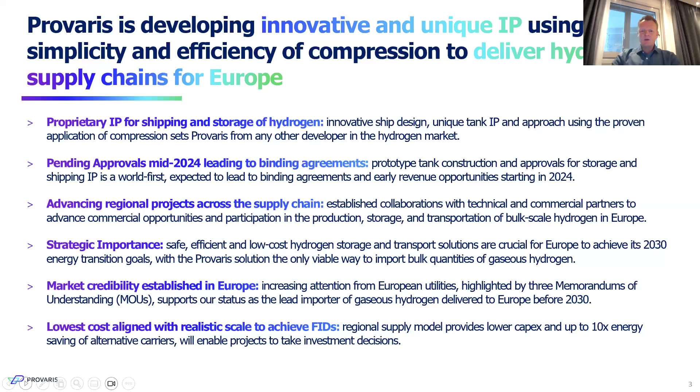So we are doing well. In terms of the assets, our proprietary ship design is still world first. For bulk scale gaseous hydrogen carriers, we have the H2 Neo, which is now up to a capacity of 450 tons. The H2 Max is further down the path, but we see class approvals in 2024 could lead to construction and operation by 27, 28, subject to being involved in projects.

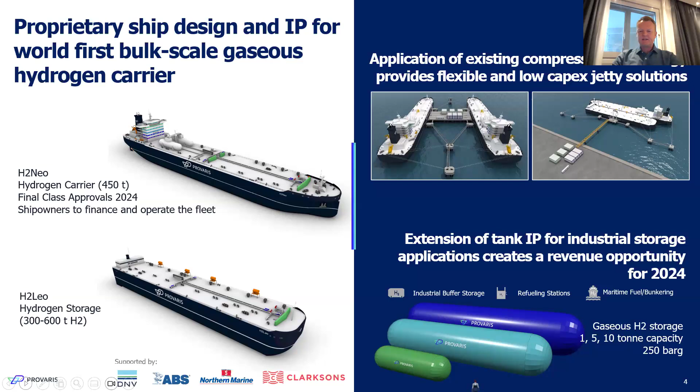The LEO still has significance both operationally for our own supply chains, but that is also available to other supply chains that need bulk storage, which you could have quayside. The flexibility and use of proven applications for both compression and terminals is absolutely relevant, because what that's doing is reducing the capital cost component of both loading and discharge. And obviously the extension of our tank IP into what we call small scale storage, but still large in terms of the existing market. So 1, 5 to 10 ton capacity is a breakthrough for that industry.

We talk about a platform of commercialization activity. Just a reminder that we are involved across the H2 production, shipping and storage elements. We have our proprietary shipping solutions, which sits in the middle. We have ownership of that IP, advanced design and approvals. And we will work with ship owners to fund and operate fleets under long-term charter, aligned with H2 production assets.

We've had the collaboration for H2 supply with Norwegian Hydrogen here in Norway. We are talking to others about other collaborations for supply projects, and those supply projects are on the basis of using our shipping solutions, so we are integrated and integral to those assets. Clearly, there are a number of hydrogen infrastructure funds seeking to invest in proven and advanced projects.

And lastly, on the ports and distribution side, we've had to go out and source the market for ourselves. So those three MOUs we've mentioned for supply with utilities. We have now the collaboration with GES for the Rotterdam terminal, and we are talking to other terminal operators in Europe as well.

So the revenue sources and value creation for our shareholders come from equity share in hydrogen production assets as they mature through their stages. We see license fees for our ship design for those ships going into those projects, and ultimately we should be able to demand and secure a share of those cash flows from long-term charter agreements. The supply agreements will obviously underwrite the projects for both supply and the shipping assets, so they are important.

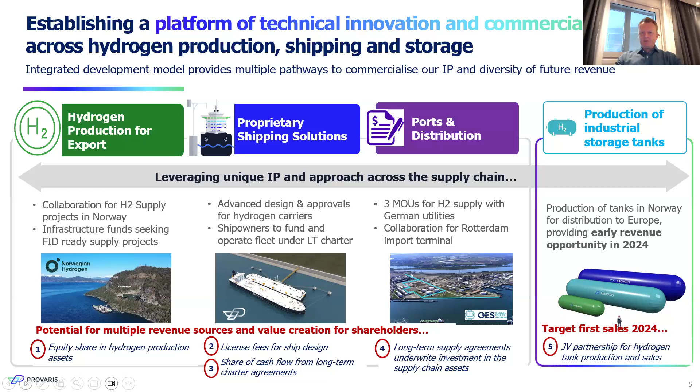This slide we've had in our deck for a little while now. It is the basis of why we are relevant. So the simplicity and energy conversion efficiency of compression is what's demonstrating the lowest delivered cost of hydrogen. So while we do get penalized on energy density from a carrier point of view, when you look at the full value chain of what's required in terms of hydrogen energy to convert that hydrogen into a carrier, we're up to 10 times less in terms of what's required.

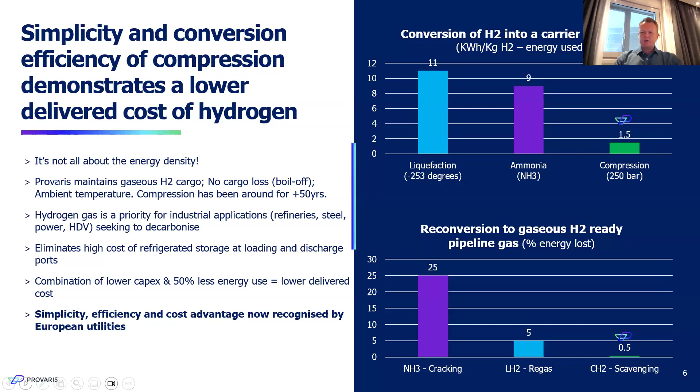And when that ship arrives and there's a reconversion process that takes place, delivering at gaseous format means that we use very little at the delivered end. So what that's doing is eliminating the complexity and high cost of other alternatives looking at refrigerated storage, be that chemical or liquid. So if you can lower the capex, use 50% less energy loss, you are the lowest delivered cost. That simplicity is what's cutting through, and I think this is where the focus is now in terms of the industry trying to look at capex and energy savings.

We've been focusing over the last 12 months in Europe, but particularly on the German market. It's quite clear and evident in the reports that the government is publishing. They have total demand by 2030 to achieve multiple assets or pathways for their energy transition. They are phasing out coal, they've banned uranium, and so they are reliant upon hydrogen to develop and move forward.

So with that, there is a clear requirement for imported hydrogen in the order of 1.5 to 3 million tonnes just within Germany. And then more broadly, we see a 10 million tonne market in Europe. So it's the steel manufacturers, it's the oil and gas refineries, it's power generation, and then longer term, there's markets for trucking and marine. So import infrastructure is being developed. They're tendering for H2 ready gas-fired generation, and the power utilities are investing in up to $100 billion to move forward with energy transition projects, and this all comes by 2030.

So Provaris is now relevant as we are providing a low-cost source. Working in Europe is a regional model, so we are advancing on the supply front, and that's what's led to those MOUs with German utilities.

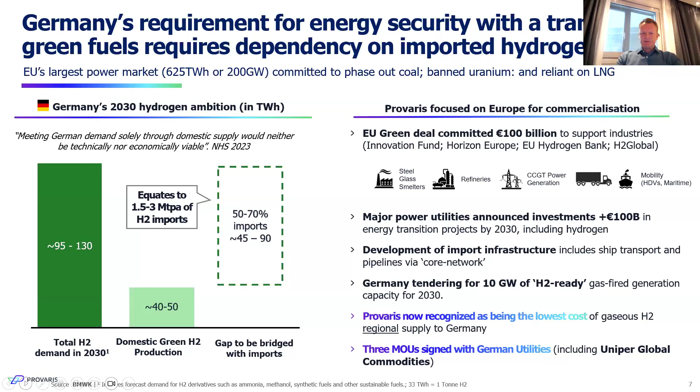The assets, like all regions we've seen in Australia, benefit from recent announcements around policy incentives on both capital and operating costs. Europe established the European Green Deal back in 2019, so they've been legislating climate change for some time. It's estimated some €100 billion of funding will be applied here in Europe. What we've seen in the last year particularly is specific large multi-billion-dollar funding schemes being announced to generate both supply and offtake. In the last six months or so we've seen the emergence of industrial scale tenders for offtake across refineries and particularly steel. So CapEx is going into supply, into downstream applications, and there's subsidies on a hydrogen basis. That's important as our projects move forward and assets will have application to those funding schemes.

So in summary, if you look at the European context, we established ourselves here in Oslo back in August 2022 with the appointment of Per. We have been able to progress quite nicely in terms of supply alternatives. If you look at the economic range of our H2Neo carriers, we talk about 2,000 nautical miles, and we're looking at distances typically of less than 1,000 nautical miles for the key projects we're looking at.

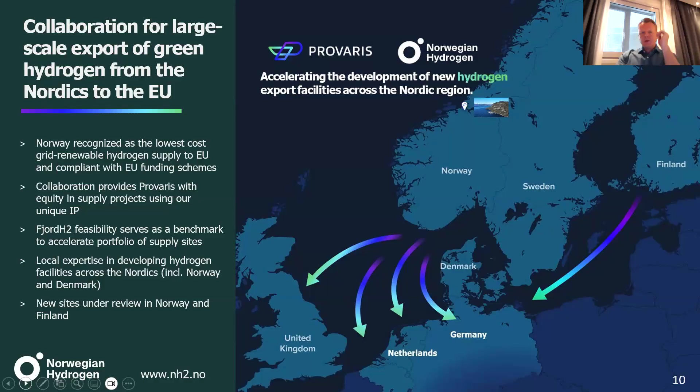The GES MOU collaboration is important. If you look at Rotterdam, it's the largest energy terminal in the world, providing 13% of Europe's energy import. They also have ambitions to import 20 million tonnes, so you need a presence there. GES operate globally across the world, and they're backed by private equity capital.

This site, we were on site a week ago. It's quite clear to us with the waterfront that it has multiple berths. It is very adjacent to road, rail, and most importantly, the pipeline that's being developed. That gives us connection not only to the port customers utilizing hydrogen in the near term, but also European market access. So GES will own, operate and finance the terminal, and together we're working on feasibility, where they would fund, build and operate, and we would support with the marketing of imported volumes. That's specific to our compressed hydrogen carriers, and that's a very important aspect going forward.

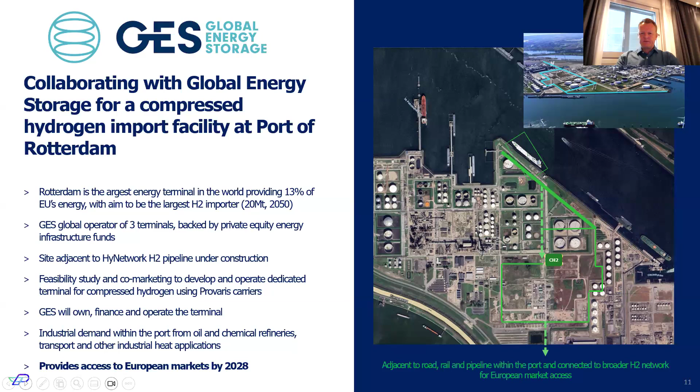So just on the program, where are we? There's a lot of focus. We have been through 3 years of technical design, approvals, studies and safety studies around the H2Neo ship. We did receive FEED design approval back in December '22. We've spent quite some time now working through an optimized design for the tank and integration of the ship.

And I'll now hand over to Per, who will touch on some of the key elements we're working around class approvals.

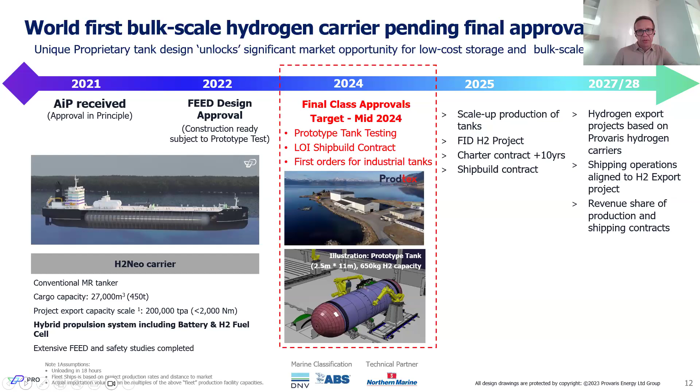If you move on to the next slide, Martin, we can look a bit at what we've done recently on the H2Neo as well. So when we work with Prodtex in automation, we've been looking at how we can optimize the plate thickness and the welding, and essentially the weight of the tanks.

We've been able to go from thicker plates to thinner plates by using automatic welding and keeping costs very competitive. With that, we're reducing the weight of the tanks, and that gives us benefits on the rest of the ship as well. We reduced the tanks' weight quite significantly in order to optimize the fuel, the size of the ship, the operating draft, etc.

We reduced the length of the ship somewhat, from 212 meters to 205. By reducing that, we reduced the weight of the hull even further, and we come down. If you look at the initial size we had on the H2Neo a year ago, we reduced the rule length, as we call it, which is the driving length of the ship, setting the scantling lengths on the hull, by about 12 meters.

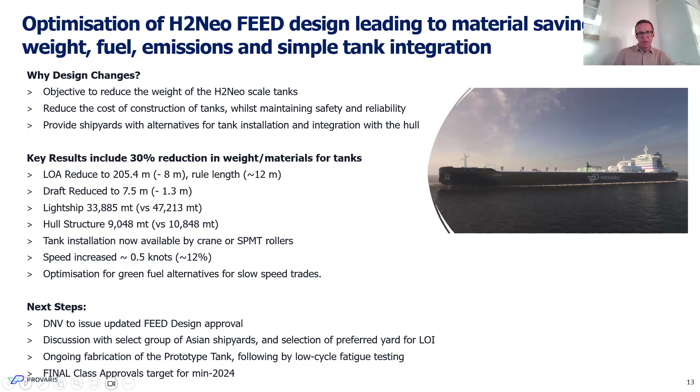As shown here, we're well ahead into the prototype tank. If we move ahead, Martin, to the next slide on that - we're building the prototype tank shown here, building it up into segments, end caps on either side, and building the cylindrical part in two parts. There'll be a joint in the middle, and that's in the prototype tank, because that's how we are going to put the H2Neo tank into the hold as well.

So the H2Neo tank, when we install it, it's going to come in 4 sections and have a joint in the middle, from each of the half-cylindricals to the end caps. So we're building the prototype tank up exactly how the H2Neo tank will be built, and that's what we're testing. It's being built at the facility shown here, on the northwest coast of Norway.

The prototype tank has the dimensions shown here. It's a multi-layer tank, with 8 layers of carbon steel and a 3mm stainless steel internal barrier to protect the carbon steel from hydrogen permeability and embrittlement. So it's essentially just a scaled-down version, both in length, diameter, and thickness, compared to the overall H2Neo tank.

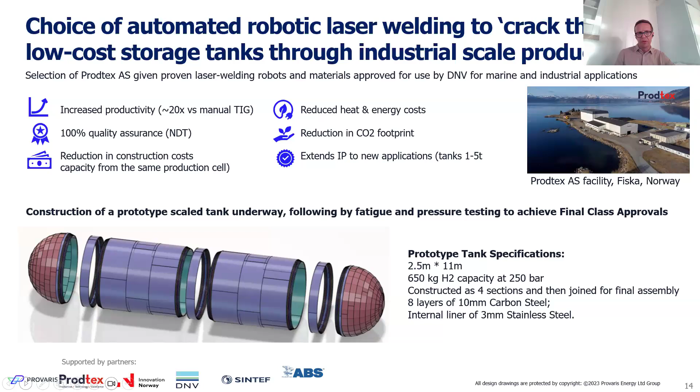It's all about making sure that the two robots shown here, one the materials handling robot, the other the laser robot, can work effectively in tandem without clashing. Pretty much all steps are programmed in advance and tested in a digital twin environment. It's very interesting for us, having been up there last week, to see how we've gone from digital twin to actually producing tanks, sitting back and watching things happen in real life now, not just on the digital twin side.

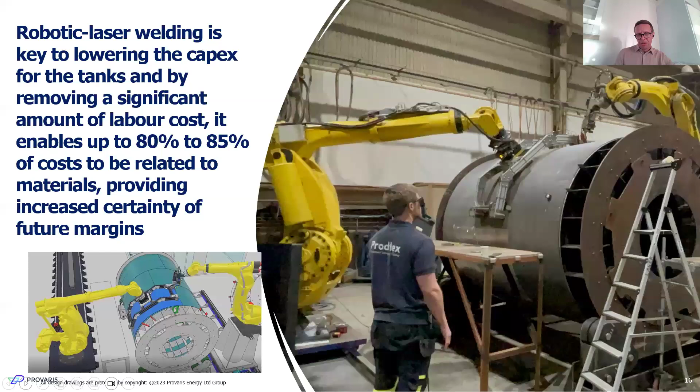So to go on, we're using laser welding in the construction of this, for a number of reasons. Prodtex have used laser welding for years, and similar applications have been used in building a number of steel bridges up here, where they see the same level of requirements on weld quality and performance as we need on the tanks, looking at the same level of impacts from trucks rolling over, etc., and having to survive a large number of fatigue cycles.

So the weld procedures they've used on the bridges we can use on the tanks as well, and they've proven really high quality results on the welds. By using laser welding compared to more conventional MIG and pulse gas welding, you introduce a lot less heat, use a lot less energy, and you're able to weld at a higher rate with less impact from heat-affected zones on the welds. You can do it all in one pass, getting a lot of benefits both schedule-wise and results-wise.

We can use the lasers to have continuous feedback from the laser head as to the quality of the weld, and have a 100% record of all the welding that we do.

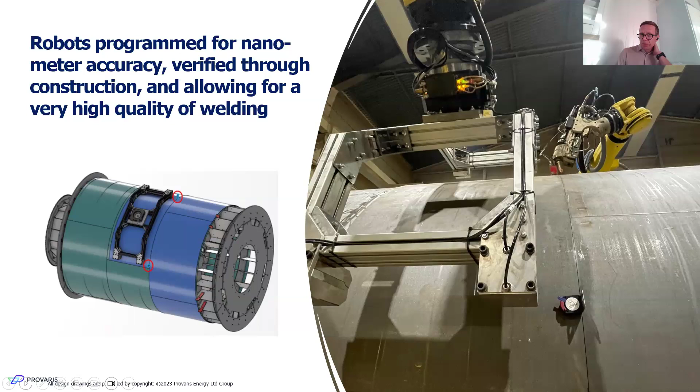Thanks, Per. So I hope that gives everyone a snapshot of the first visuals that we've seen out of the prototype project up here in Norway. We'll continue to make more detailed updates as the month of May and June goes on, and update where we're up to.

The last point of today: we've started to talk about the opportunity for a very large addressable market for industrial hydrogen tanks, be that in either maritime or static storage applications, so small scale standalone tank applications. The reality is that buffer storage for intermittency of renewable power creates flexibility and lowers cost of hydrogen. So every application will typically have some level of storage, and if you can apply storage, it adds flexibility and optionality, and sometimes cost advantage.

The market applications for these sort of 1-ton tanks is typically led by composite materials, so short duration, localized storage, and typically come low weight for mobility, but high in cost. We're actually going the opposite way. Our tanks will not be lightweight, but they will come at a cost advantage and suitable to those fixed storage applications.

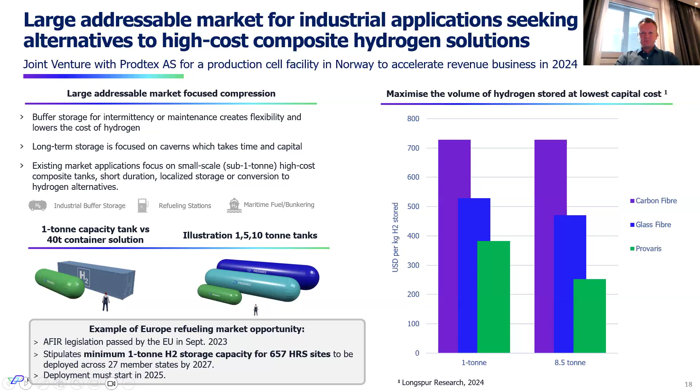In summary, we've been advancing our key milestones through 23 and 24. We appreciate for shareholders that sometimes some of these things take a little bit more time, and we haven't always been able to have full disclosure on all the activities we're doing. But I think importantly, the prototype and final class approvals is an enormous milestone, not only for Provaris, but it will be the catalyst for a number of initiatives across our portfolio. The focus of industry on that is quite high.

We were just at the recent World Hydrogen Summit in Rotterdam. We had a number of people come up to us indicating the future potential of our application. So I think we've been showing the validation of the work that we're doing. The opportunity for small tanks being ordered and sold in 24 changes the proposition of our company. It's a very low capital intensive approach to get into the tank business.

As Per mentioned, the facility is already there. The production cell is being refined on the basis of the prototype. So it's a small scale up and support here from Norway to create an export business.

We have been able to progress quite well in the last few months with certain utilities. That's then translating to what we see as more binding agreements coming forward for H2 supply and shipping in the second half of this year. I think everyone's looking for moving from MOU level agreements to binding - I think that's going to occur for us in the near term.

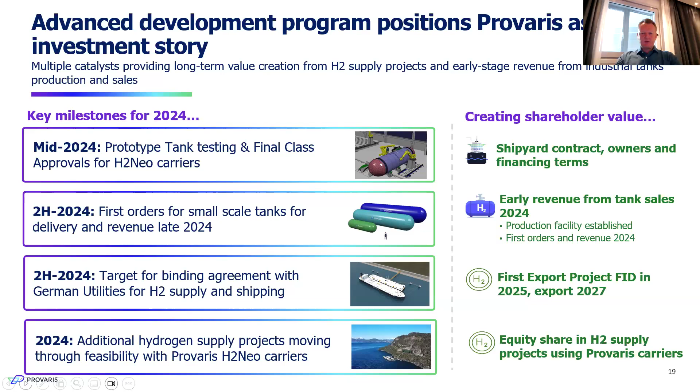So the opportunity is quite clear to us. There are no other real alternatives for supplying bulk scale hydrogen outside of pipelines, and we'll need to see a lot more supply before pipelines become the preferred alternative. Shipping exists across LNG and all other forms of energy today, so we don't see any different for hydrogen.

Just a quick snapshot on the corporate overview. We have nearly 600 million shares on issue, still a modest market cap of 27 million. The reported cash position is as of March, and then you saw recently that we announced quite a flexible and unique structured facility with Macquarie Bank, which is in essence a standby facility. We've issued $500,000 in bonds, which has already come down to 440.

That 2-year facility gives us options as we move forward. We do have a share purchase plan currently live in the market - an offer to raise up to 2 million at 4 cents. We think the attaching 1 for 3 option adds a bit extra to that offer. That offer opened on the 6th of May and closes this Friday, the 31st of May. That additional funds will support our ongoing technical and commercial activities here in Europe, and also get us through the prototype phase.

So just in terms of summary highlights, leverage the European policy actions here, which is mandating use of hydrogen. Our unique IP and innovation sets us apart from everyone. Compression, proven technology, and that gets us to the first mover advantage and the lowest cost supply.

We've talked a lot about the pending shipping approvals, which I think is key. We're seeing a lot of attention and focus on us now to get that done. And that's showing in the interest from German utilities seeking gaseous supply and their end-use customers, which are typically using gaseous hydrogen. So we will continue to advance projects in collaboration with local partners, and ongoing, there are always multiple pathways for funding, whether it be grants or incentives here in Europe, or different funding alternatives that we've seen through development. So with that, I'll hand back to Mel and take questions.